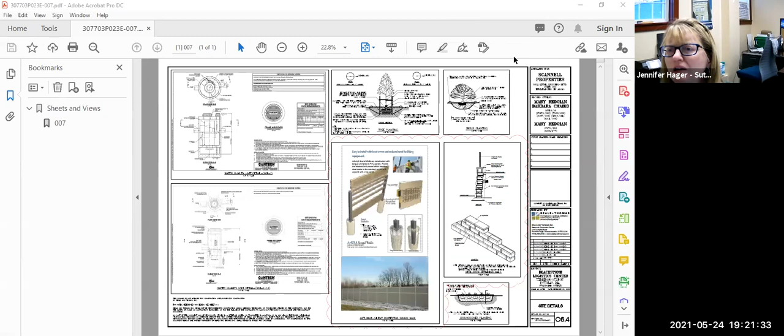Okay, Jen. I'm going to share my screen and pull up the revised plans that were provided. One moment, please. All right, can you see that okay? Yes. Yep, awesome.

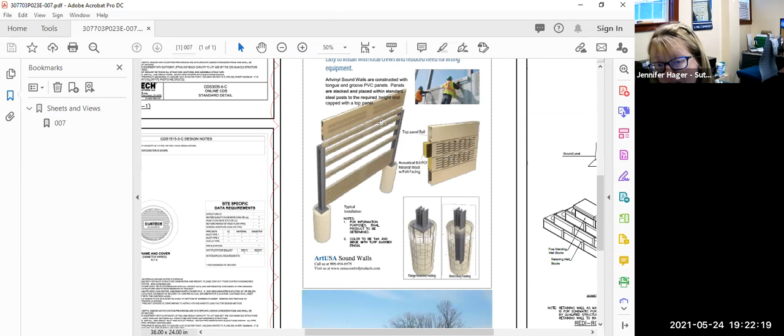All right, so on this plan set, you can see the applicant has updated a few things. They added a photograph of the potential sound wall type, which seems pretty benign here. The only two things missing are the color, which frankly is fine if it has a name, and this panel detail, which really needs to be eliminated for confusion, because it's the weird punched louvered detail I've shown you photographs of, which looks horrible when used at a large scale.

So it's a minor item, but this detail needs to be shown as solid panels that match the photograph. That just needs to be updated.

Jen, do you take that one real quick? Sure. So if you look on note number 2, that addresses both of those comments. It clarifies the colors to be tan and beige, which is the actual color code by the manufacturer.

On this? Yes. And then the turf barrier is actually the smooth face. I can pull up a brochure from the manufacturer, that's their code for that. If you can just submit that brochure, that'd be great, and we'll just make it part of the record. I'll be comfortable with that if the board's comfortable with that.

I was going to say, we tried pretty hard. We've been working with the engineers over at the manufacturer about getting a better detail, and I don't think the details they've provided so far would be more insightful than what you've got. Yeah, I did look myself to try to help you out, but I didn't find one either that was better for detail. Yep, we'll send that to you, Nate.

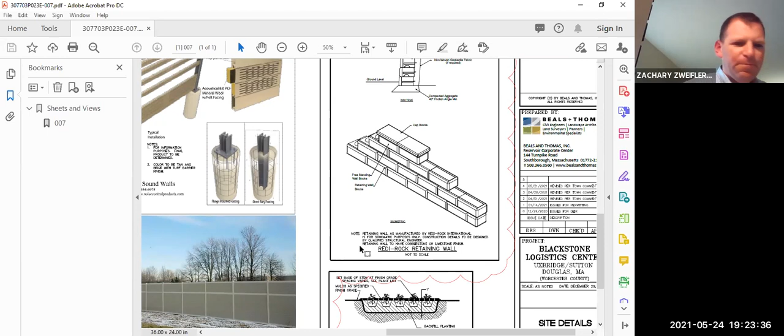And as you can see, a note has been added here: retaining wall to have cobblestone or limestone finish. So that was the requested finish on that wall. So that's that one.

Jen, could I make one comment to the sound barrier? Sure. The sound consultant had made a recommendation for a minimum weight in pounds per square foot of the sound barrier material. So I believe the board will want to make sure that has been achieved as well. That's the 5 pounds per square foot. I think so. I don't remember the number, but it was in that ballpark, yes.

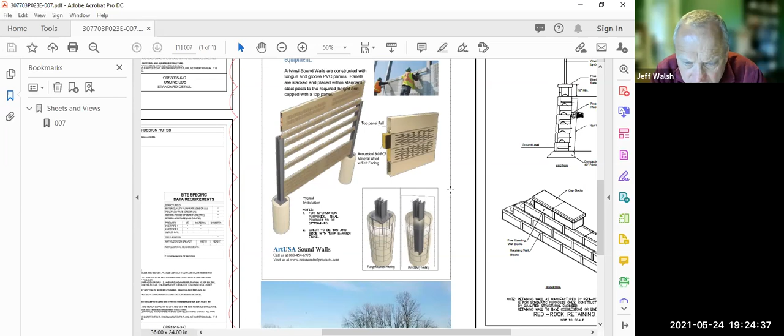And I'm seeing this acoustical panel that's not going to be used is 8.0 pounds per cubic foot, not square foot. Nevertheless, it's just a detail that should be double checked to make sure it's the material recommended, or one of the materials recommended by the sound consultant. Thank you. If we can, the sound consultant's on the call, he can validate right here, right now. That's helpful.

All right, Mr. Chairman, are we done with this one? Any board members have any comments on this? Hearing none, then we'll move on to the next item.

Okay, so the next one is this one. All right, so what we see on this one is, per my request, basically a note that grays out this northern parking and shows it as potential additional paved parking, and shows how this edge would be finished. It's not clear here if, because the landscaping still shows dark, my assumption is that landscaping is staying, even though it's kind of weird right here.

So that just needs to be clear if it's intended for this landscaping to stay. And then the thing that was not addressed was my secondary comment that came via email, which was that this trailer snow removal area is in kind of an awkward position because it's in the circulation around the building. And in part because we don't have any detail what's actually happening here, that could cause a problem, obviously.

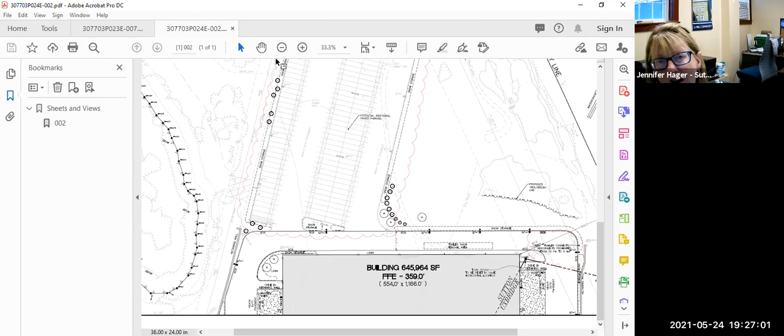And then the only other thing on this plan was to see if the board is comfortable with the hours on these signs, because the hours are per the sound study comments. They have used 10 p.m. to 5 a.m., so trailer connects and disconnects are prohibited from 10 p.m. to 5 a.m. So, knowing if the board is comfortable with that, or if they're open to trying that and putting in a condition that if we get a bunch of issues, those hours would get shortened in the evening and lengthened in the morning. So those are the few things on this page of the plan set that I'm looking for applicant input on or board input on.

So I have a question.

Did I read that this lot is proposed if needed? Because we're calling out for 428 spots and there's only 178. This could be added if needed, potential added, right? Yes, so one of the waiver requests is asking you to go from 428 down to 178, with this banked basically.

You'd probably have a condition if you vote that waiver, as well as a condition of approval, that the applicant has to come back to you once they know who the tenant is, to review the specific parking needs, add stuff up front if need be, and or do some monitoring like we do on other uses to see if operationally a problem arises and then the stuff needs to be added. So right now this is meant to be banked and not paved over, but that's up to you guys when you deal with the parking waiver.

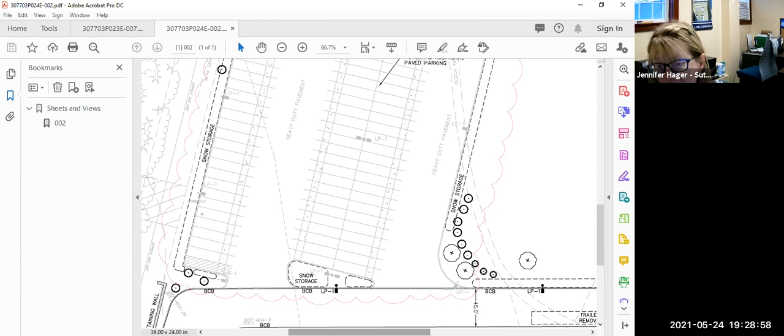If you're not comfortable with that, then you would have them build out all or a portion of this, and you would designate whether that would be trailer or car or some combination thereof. Well, I guess it makes a big difference if 2 trucks are leaving a day, they don't need all that, but if 500 are leaving an hour, then it's going to be a different story.

There's actually snow storage all along both sides of that lot. Great. Okay, so Todd, any more board comments, Mr. Chairman, or do you want to pop it to the Scannell team?

This is Mike Gagan, if I could just have a quick comment. I would just kind of follow up on what Jen said about the snow removal piece, and wondering if there's been any thought of the removal area not being that close to the building, in that turnaround. Is there any other way, anywhere else away? It does seem like if there were many trucks leaving after the storm, it'd be a lot of snow to be moved from that area over to the snow storage area, hindering the pattern, as Jen suggested.

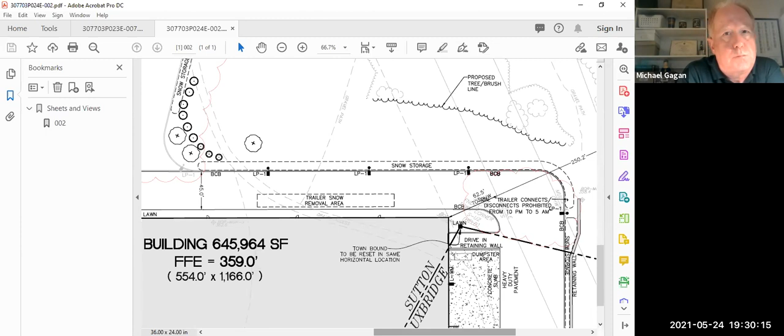Okay, so why don't we, as the development team, try to answer those questions? Perhaps we can start with that landscaping question that Jen raised about those portions of landscaping that still show on this plan. Go right ahead, where are those going?

This is Dan Feeney from Beals and Thomas. If the northern parking area was not to be built, the landscaping would be eliminated. It would not be included until that parking lot would be built. All right, so there would be no landscaping along this edge.

Correct. All right, so just gray those out. Is the board okay with just these ones? These ones would still be here, right? Right, but these ones would be eliminated. Is the board okay with that?

So in the area where the proposed additional parking is, if it's not utilized and paved, what would it be? Just an open field or just? What's there now? Right now it's an open area. You know, there's no significant vegetation out there.

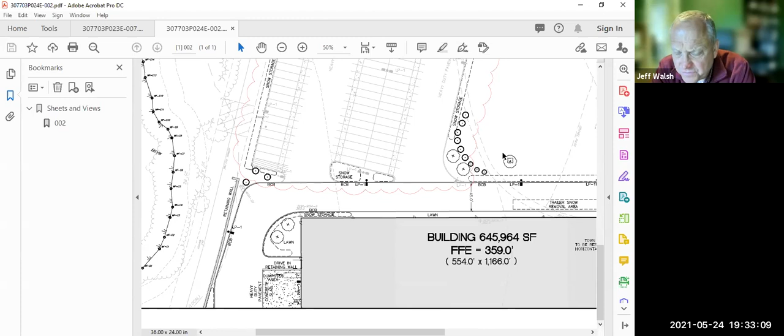And that landscaping is in and around that open infiltration basin I spoke of earlier. There's a basin? No, here, right up against the landscaping. Right, oh, here? Yeah, it's down in that general area, Jen.

So the basin stays, Dan Feeney? The basin would stay, would promote infiltration there. It's not a large basin, it's a very small basin there. So Jeff, do you see a need for the plantings in terms of safety or functionality, or just aesthetics? Aesthetics, okay, at the back of the building.

So if there's a basin in this area and these aren't planted, this would all just be graded, loamed, and seeded with whatever the basin calls for? That's right. There's a pretty steep hill on the right side of those plantings going up to the tower, to the right of the page. So at least this area would be kind of loamed and seeded and need to be maintained.

My recommendation, if they use some or all of the north parking area for staging during construction, that's fine, but it should be permanently stabilized with some vegetative cover after. If they leave areas further north where they don't even go, it's growing in, taking time. I'd call it thin vegetation now, but it's a mix of grasses and brush generally, with a few saplings coming up. If there's a way to augment the vegetative cover, that would be nice. I don't expect a lawn or anything, but beyond what would be stabilized with vegetative cover for disturbed areas, it would be nice to try to augment some of that growth that is coming in and has been over the years.

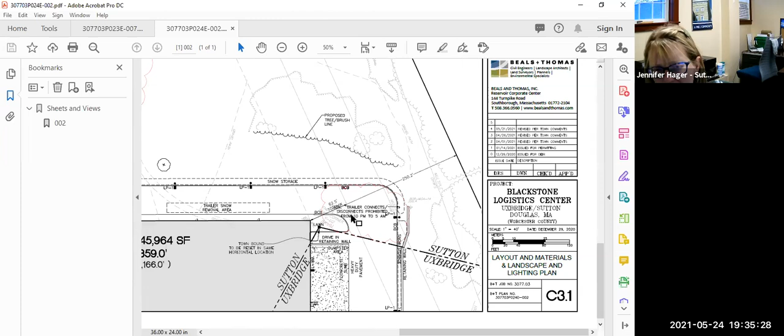All right, so how does the board feel about these hours where you can't connect or disconnect trucks? 10 p.m. to 5 a.m. Are you comfortable with that?

Through the chair, I feel like those hours, at least to start with the condition that if we get a bunch of complaints or any issues popping up, we can change those or come to an agreement further down the line, would be great.

Do those hours correspond with the applicant? Are they happy with that? Well, we don't know the specific user. Correct. I guess if you ask happy, I think we'd prefer to have no restriction on our movements, but it's reflective of the recommendations we got from the sound consultant. So that's where we pulled it from.

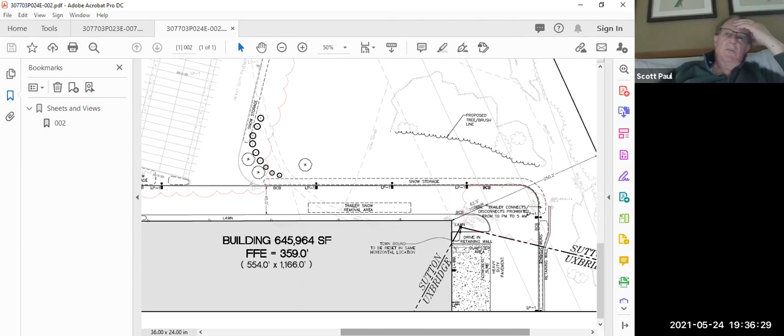No, that's fine. And is that because there's backup beepers on all these trucks when they're backing up? Well, and that connect-disconnect makes a loud noise, the air hoses. So yeah, that was part of the Cavanaugh Tocci recommendations, I think. Yes, the banging of the steel when they're coupling, and in the back, when they're coupling up, and if they pull away from the trailer and they don't have the landing gear on the trailer all the way down and it drops to the ground, it's going to make some noise as well.

All right, so anybody want to comment on the trails, what we're really doing for snow removal off the trucks? On the applicant's team? Want to take that, Dan?

That'd be great. Thanks. You know, because there's no tenant, we don't want to box them in necessarily. We picked the location shown here because it's on the outbound exit for trucks coming back around the building to exit. So it's on the exit side of it. If it was a mechanical blade removing the snow, it would compromise some of the width of that access drive, but that's a 45-foot dimension, just to the left of the trailer snow removal area there. That's a fairly wide access driveway. So if we're taking up 15 feet for the mechanical snow removal, it's still leaving a 30-foot wide access through there, which is a more typical two-way truck traffic access. So there is some room in there to do it. Based on the layout of the site, it seems like an appropriate place to have the snow removal.

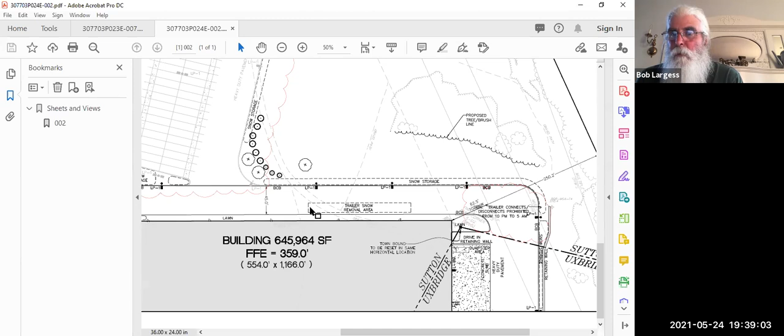Bob Largess, through the chair, if I understood where the traffic was going to be moving in and out of the property, I thought putting it right there would take care of itself. Obviously, if there's snow, it has to come off the top of the tractors, and there'll have to be a piece of equipment there to get it out of there. Otherwise, they're going to clog up their whole system. So someone is going to be in charge of a backhoe to keep that clear so the snow gets out of there and the property can actually work. Yeah, it'll be an operations issue for the tenant out there to make sure they can move it and deal with it. Nothing's going to happen—there'll be no hooking up to anything because everything's going to stop.

That's why it's a great spot - they have to deal with it, they can't ignore it. What we're anticipating is these mechanical blade snow removal units - there's options where they can come out on wheels, so they're not out there year round. They can wheel them out, the supports come down, the wheels come up. So they're flexible with where they can be located on the pavement - it's not casting concrete into the ground at any one location.

So it sounds like you're most comfortable with some kind of condition? We're not sure we really understand what you mean by that - we've got a trailer snow removal area, we're talking about an operational question more than anything. We have the area, we'll provide for that. A condition would say that the area needs to be designated on the site - the operator, whoever's actually occupying the site, has to tell us exactly how that's going to happen before they start operations, because we're not going to wing it on the first snowstorm.

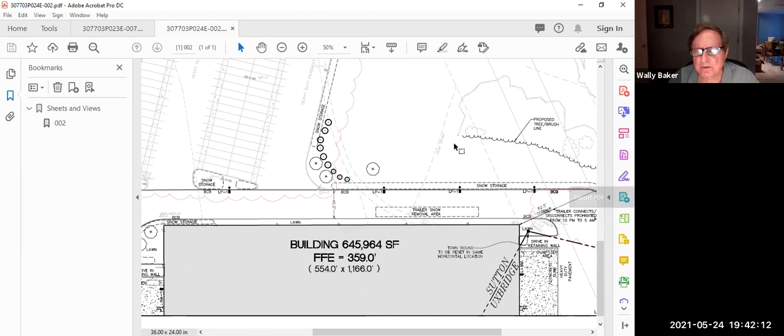Perfect, okay, good. You happy with that, Jen? I'm happy with that, but I'm not making the decisions. Well, could we make it a condition of occupancy or something? I don't know, well, let's see what language Attorney Donahue drafts.

All right, so no landscaping here. We'll go with these hours for now and have a condition if there's issues that are revisited. And then Attorney Donahue will draft a condition relative to snow removal. Is that where we are on these few things on this sheet? Yes. Awesome, all right, let's go to the next sheet.

I believe this is the open space plan. I just wanted confirmation, Dan Feeney - it's kind of hard to see the outline of lot 1 here, but it looks like it goes to the Route 146 line here, and then kind of down along here. So of the portion that's in Sutton, which is right here, you're saying that there's like 1 million plus square feet in Sutton.

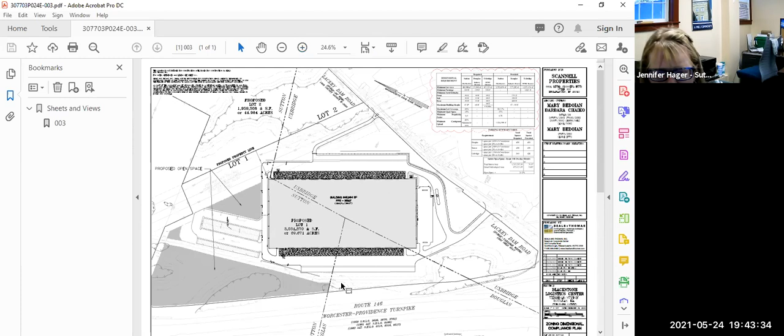And that these gray areas, they're not in easements and they're not being developed in any way. And that those areas equal roughly - let me just scroll over there - right here, 473,000 and change is what is shown in those gray areas, which is almost exactly 35%. Is that - I just want to verify that. That is correct, yep, the gray areas are outside of the easements.

You can see where the Tennessee gas easement is in between the gray area and the gray out northern parking. And then the other area, we're right up to the 250-foot national grid easement. And then just to get up to the 35%, there's a little bit north of where that larger snow storage area would be.

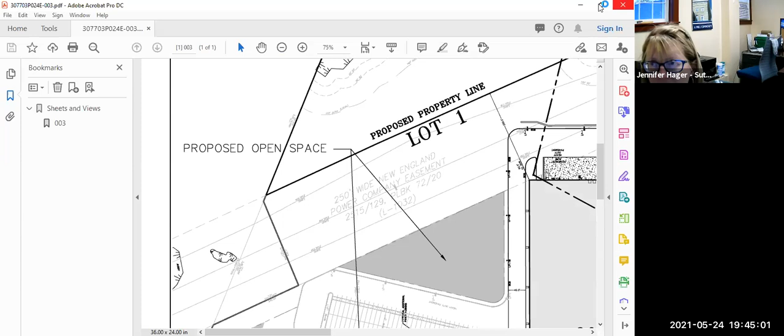All right, okay, I just wanted to confirm that. And then this plan would potentially just be attached as a back sheet of any special permits, and that would be the means by which that would be restricted if the board's okay with that - so it'd be referenced and recorded along with the special permit. Yeah, good with that? Okay.

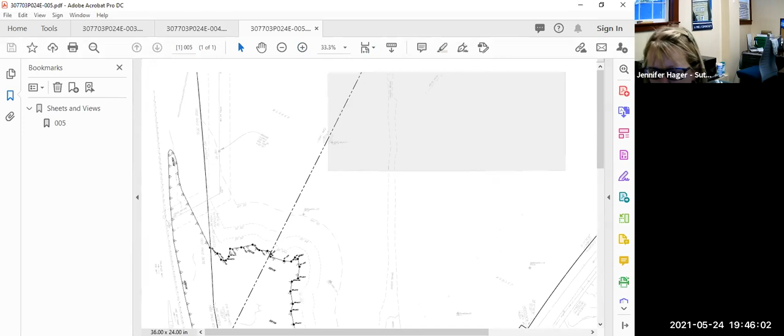Okay, this sheet. All right, so what we have here is a few minor things. The applicant has added a sign location right here, and based on the position of the signage relative to the edge of trees and the stop line, it would appear that's not going to be an issue with sight distance because it's behind the stop line and behind the tree line.

And then there is a tractor trailer right turn only sign right here. Though I had preferred an island that forces you to turn right, the applicant wasn't really comfortable with that because it's hard to not let employees turn left. So you'd be making everybody turn right, and it might inhibit the swing as well with the trucks turning in to the left. So is the board comfortable with that sign location? Is there anything other than this right turn only sign you wanted? And did you think that should be a minimum size?

Mike, do you have any comments on this? No, not really. Like you said, Jen, I trust your judgment on the sign location is sufficient. On the issue of a dedicated right-hand turn, I think we should defer a little bit to the folks in Uxbridge where the land actually is, that entrance. I think they're the ones immediately impacted by that, so my opinion would be to defer to that town who's being impacted by it the most.

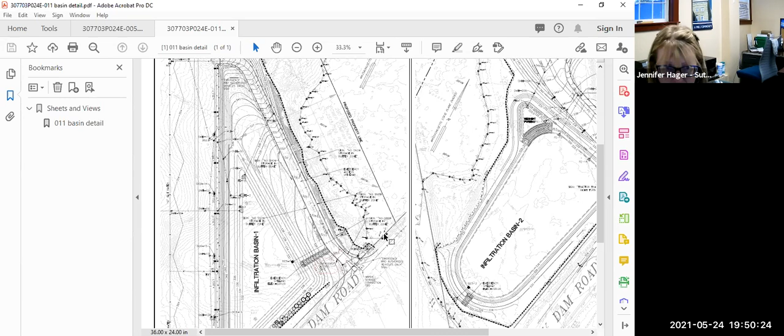This plan does show the water connection coming from Whitinsville Water District, just calling that out. My one question was maintenance of these basins. How will maintenance be achieved on these basins? You kind of go in and then have a little berm here. But they're not small basins.

Dan, did you have any detail or comments on how these would be maintained over time? Yeah, as part of the stormwater management report, there was an operation and maintenance plan submitted that specifies the frequency of observations needed on the basins, as well as catch basins and water quality structures and the other stormwater components on the site.

In terms of access to infiltration basin 1, as you get a little further up the page, right where the 335 contour is, it's pretty flat shot into the berm of the basin there, and then you can go around the basin. If you come in anywhere down from there, where that 337 contour is, that loops over towards the basin.

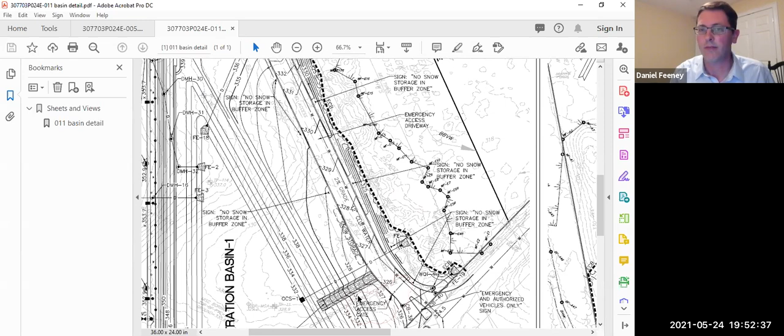Infiltration basin 2 is similar. The grade of that basin, the top of that berm, isn't that different from the entry drive. And it's right off of the entry drive, so you can get around that basin as well, and into the bottom of the basin for any maintenance that you need to do.

Yeah, they are significant basins, so I wanted to be sure we had it on the record that, like you said, in the plan, there's a way to get in there that's reasonable.

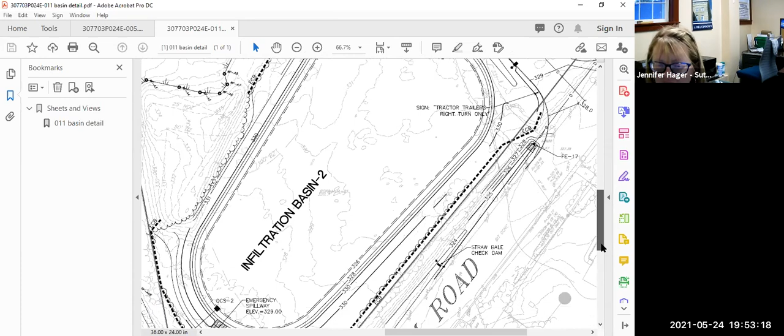All right, so I'm going to stop share. I'm just going through my, oh, whoops, sorry. You thought I was done torturing you. Just 1 minute.

No, it's not here. It is not here. I was going to pull up the architectural plan, but you guys have seen that.

So there's been some great little windows added to that. The colors have been called out, which is awesome. But I just wanted to review just a few things with the board and make sure you're okay with those, and or see if you wanted to defer those to somebody else or whatever.

So the detail sheets on the architectural plans now clearly show the vertical lines on the building, those breaks between the panels. The concrete wall panels are about 3.5 inches wide, about 3/4 of an inch deep, so they're pretty tiny little divots. But I don't know that they're any different really from the Prime Metals building.

We're hoping that you'll basically see that scoring. The interesting thing though is on the building plan - you've got a building that's 1,166 feet long, pretty long building, and then it is 554 feet wide. And the proposed bump outs, those 3 bump outs on the front, are 10 inches deep.

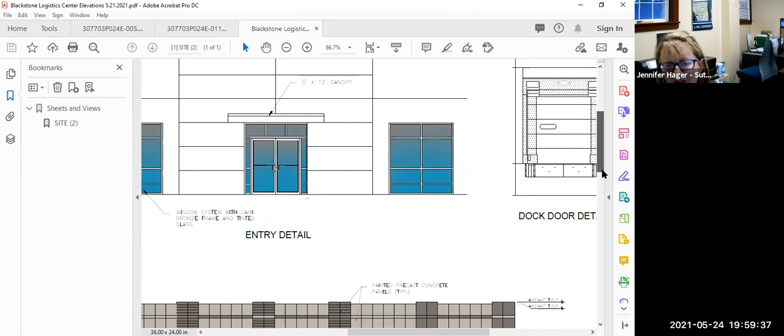So this is the office doors. You've got a little 5x12 canopy over the front, and these are the little bump outs. So these three columns here are scored, not really a different material, they're just scored differently. And they stick out 10 inches.

Like I said, let me show you the other one. Can you see that one? When you look at this one, see, this is the detail - those bump out 10 inches deep on this giant building.

These are the little bump outs. So this is 1,166 feet long, and these bump out 10 inches. There's 3 of them. There's 3 of them.

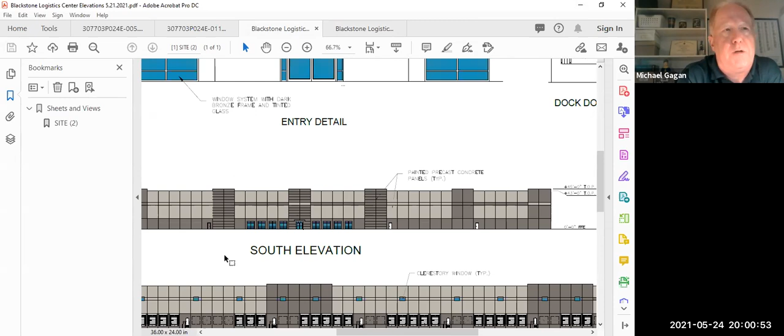Jen, can I just ask though, if you were looking straight on, would it be more important to see the depth of the bump out versus the scoring of it, which would visibly look different than the rest of the building? I think the scoring certainly helps. If it was a different material, like a wood tone or a stone tone, it would look even more pronounced, and maybe you don't need as much depth, but it's the same color, and the only difference is kind of a difference in scoring. So that helps if those kind of pop out more. It's kind of a combination of the things.

But again, this does sit in Uxbridge, this elevation. So, I mean, you can just, if you don't feel strongly about it, you can just leave it to Uxbridge. And if anybody says that wasn't all that creative, then you can just say well, it's in Uxbridge.

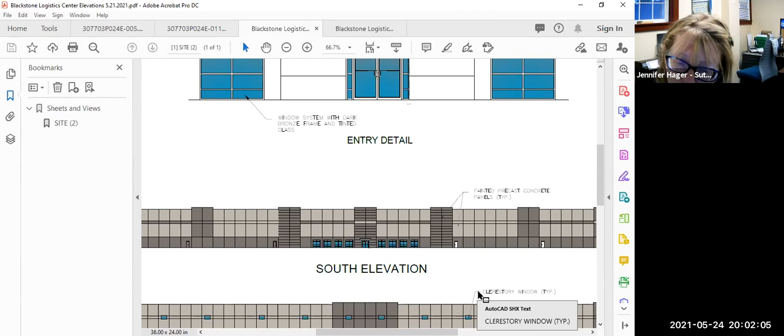And there is going to be a bunch of landscaping, obviously, between the front of this building and the road. But as you know, as we've done with every one of our industrial buildings, even if you don't see it, we try to make, unless you're into the site, we try to still make it kind of speak of the quality and of the building, of the company and the community.

Again, I'm not going to be hurt if you guys disagree with me. I'm just calling out the facts, and I am happy that those windows were added along the sides. I do think that makes a difference even on those very long plain sides. I think that does make a difference.

But these elevations are showing different colors or shades. Yep. Of cementitious or EIFS type material, right? So yep, visually they look different.

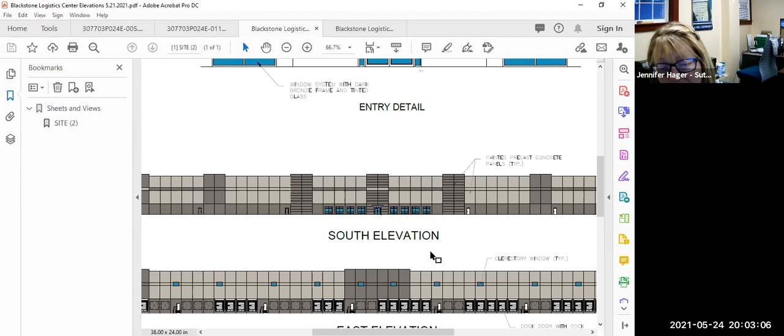But what do you think would be a good relief, like 24 inches or 10 inches? Well, on a building this big, the deeper the better. But I mean, yeah, you would at least give it 2 feet, 3 feet at least, or there's a lot you can do with this kind of precast concrete panel. Maybe there's something different you can do to make this look more stone-like. So that I just don't know.

This is the one thing I didn't look into. I usually do go right to the companies and look at their stuff and see what's out there to try to be helpful instead of just whiny in terms of plans, in terms of architecture, but I haven't been able to do that. So completely up to you guys.

If you think more relief should be added, then we can put the applicant back on the task of adding more depth, and or if you think something should be done that's more of a variation in those 3 columns. I mean, I don't know why you need them on the back, other than that's a very engineering kind of thing to see that complete on the back of the building, how you see the 3 same.

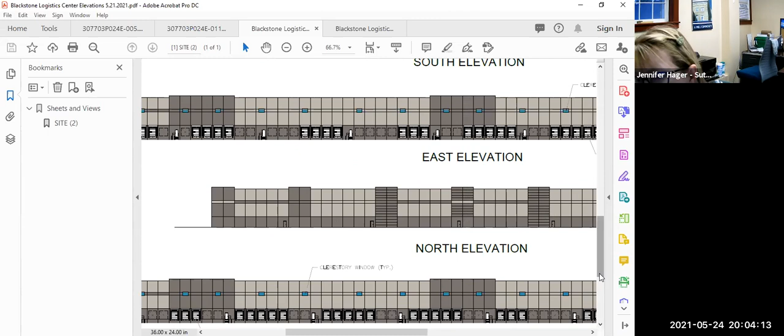It's nice, but not necessary. I would think on that north elevation, if it costs any more money, I would lose those. But yeah, put the money in the front. No one's going to see the back. Right, I'd be willing to support the increased relief, not just to support Jen, but it's been consistent with all the other buildings.

All right, Mr. Chairman, if you just want to run through the board so we can move past this one. Okay, Mike, Kyle, do you have any comments on this?

Personally, I don't know if it's really needed. This is a giant building. There's only so much you can do that's really going to break it up, and I think they've done a good job with different colors, adding windows. If the board feels strongly about it, I'll support them on that, but personally to me, it doesn't make a difference either way.

Bob? I would feel stronger if the whole building was in Sutton. But this is, we have two other partners, and if our partners are fine with this, then I want to be part of a team. There'll be other places I'd want things to stand out in Sutton, but I wouldn't draw a line in the sand here over that stuff. I'm happy as it stands.

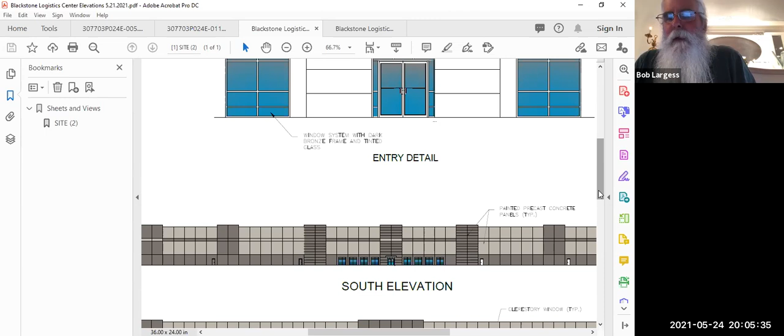Scott? I would agree with that, and we have other potential challenges facing us moving forward in Sutton. I probably will never drive by this building except to take a look at it. I think it'll be blocked by trees from what I can see, as I have driven by here, and it looks like it'll be nicely blanketed by trees and set back pretty far from the road, so 10 inches, 2 feet, I'm not sure I'll be able to differentiate that.

Mike? Yeah, I would really just concur with Bob and Scott as well. I don't think it's the biggest issue that we need to look at, given that it really is in the other town's piece of the building. Again, I think if you're looking at what she said about how far it was out, bumping it slightly more, I don't think it's going to make a dramatic difference. So I don't really have an issue with it.

Having been at the town meeting a couple of weeks ago, there's always the discussion of, oh, these are big and we're going to see it and all that kind of stuff. So to me, the money being spent on large visual foliage, plantings and trees to separate and block views of the buildings makes them more palatable. Makes people stop saying I can only see it all day long, and geez, those trees are nice. So I think the money's better off hiding it rather than making a lot of relief issues too.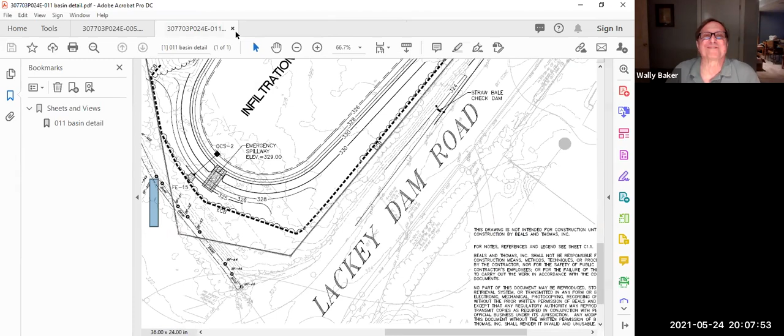So, see proof that the board are not my puppets. We're going to think I did that on purpose.

Okay. So open space we dealt with, truck cleaning we dealt with, sound wall we dealt with, times we dealt with, the bump out, and then the earth removal.

You have a note for earth removal on one of the sheets. I did forget to pick that up. The note says, based on geotechnical recommendations, earth material will be spread in undeveloped areas or removed from the site. So it's my understanding you may be considering withdrawing the earth removal application. If so, I would just either adjust that comment, or we'll make sure we put a condition per our bylaw that anything over 300 cubic yards either needs an exemption application or an earth removal permit.

I thought I saw some calculation in Jeff Walsh's comments about this, and it's a lot more than that. But he thought that the plan could go forward without the need for a permit. Is that right, Jeff? Am I putting words in your mouth? I apologize, Scott, I don't recall that. Let me take a look.

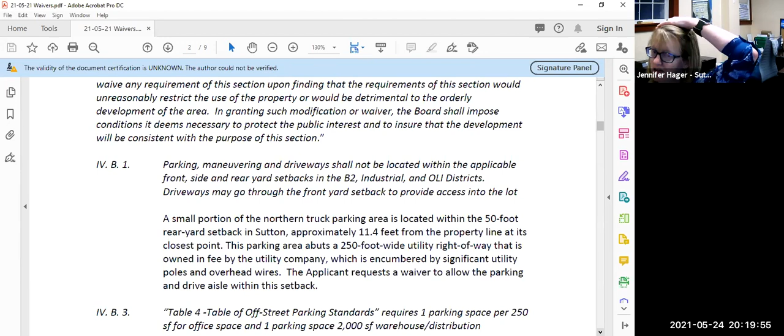So this first one, 4B1: you can see the northern parking area that right now would not be constructed, but would be if need be. That northeast corner was in the setback, and as you recall, it abutted pretty much just the rest of the open land there, not really a direct usable abutter. So how does the board feel about allowing the parking and maneuvering in the setback in that northeast portion, which may or may not become employee or truck parking, depending on the applicant?

What we're looking for on these is: that's not our waiver, or this one is - motion to grant the waiver and why, or motion to grant the waiver and why with conditions.

Through chair, go ahead Kyle. I'll make a motion that we grant the waiver for the potential parking in the setback near the property line. I'll second that, but I have a question to clarify - it says approximately 11.4 feet from the property line at its closest point. So on average, what is that number, and for how long along this line approximately?

Dan, did any of the new sheets show that? You'll see it grayed out in sheet 3.1, which was the one that had the remote area grayed back. It's hard to get an average. There's a point - you can see the point right there. Right, that's where it's 11.4 feet off.

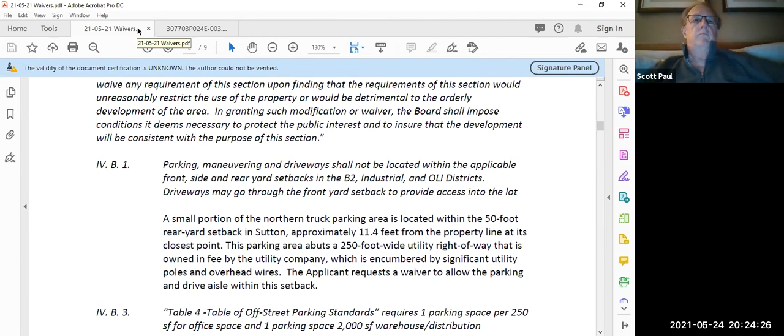Any comments? Hearing none, the chair votes aye. Mike, aye. Scott Paul, aye. Bill Talcott, aye. Bob Larges, aye. Vote passes 5-0 and one abstention. Kyle, I'm abstaining, acting as associate member right now, so my vote wouldn't count anyway.

Okay, so the next one is the overall parking thing. According to our regs, they need 428 parking spaces. They've got 178 employee spaces. The rest of the spaces on the site, per comments by both Jeff and myself, are really just tractor and/or trailer parking spaces. So you need to decide if you're going to waive down to the 178, and whether to count any of those trailer parking spaces, in which case we'd add stuff on. And no matter what you decide, you might want to condition here in the waiver vote and/or later in an action vote what happens when you have an actual tenant lined up.

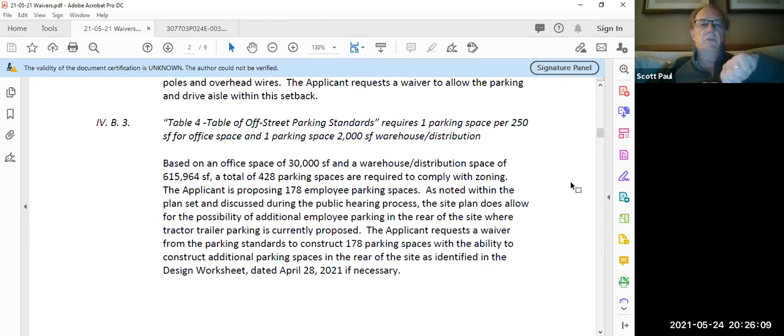So I'll make the motion, but I'd like to get some clarification first. I make a motion that we grant the waiver for 4B3, table 4, for off-street parking standards and the requirements for the number of spaces as written. I second that, Bill Talcott.

So my question is, the 178 parking spaces are shown for cars, is that correct? Yeah. The trailers are shown all around the building because we anticipate this is a place for trucks. If there's more trucks needed, then that ancillary lot to the north is available for construction - is that my understanding? For trucks or cars?

I think the reasoning Jeff and I gave was that when we look at parking standards, it's usually kind of about the employees, not so much what you saw on these edges, which was more operational spaces in nature. We were thinking the parking standards are for the employees, so it's not likely that Joe would pull in his pickup truck, park it in a tractor trailer space, then take his tractor trailer and leave. He's gonna park his pickup truck somewhere else and then take his tractor trailer truck and leave. So these are kind of operational spaces - they're really not part of what we typically do for parking calculations.

So now the board as a whole or a majority can feel differently and say, hey, there's 178 parking spaces and there's X tractor trailer spaces - it's not on here anymore. So we either meet the requirement or we'll allow a waiver considering these, as long as when the tenant actually comes in, they have to tell us about their operation and their parking needs, and we'll add more if need be, tractor trailer or employee spaces.

I know, but are they gonna have a tractor and a trailer both sitting there, the 100 of them? I think our traffic numbers are pretty explicit that we have more tractor or trailer spaces than we do truck trips a day.

Okay, so the intent is that there would be either trailers stored more than one day, and or there'll be multiple trailers there for a single tractor.

So if you think about a normal movement, a tractor will pull onto the site, drop its trailer, pick up another one. That's at least two spaces right there, assuming every tractor is picking up and pulling out a trailer, or every trailer is getting moved every day, which is often not the case.

So in the worst case scenario, the tenant that comes in here needs 927 spaces. That's not gonna work, right? That tenant can't get considered because there's no space for them.

Right, yeah, I mean they'd have to come in with a revised site plan and say how it works, or they can't go here, right?

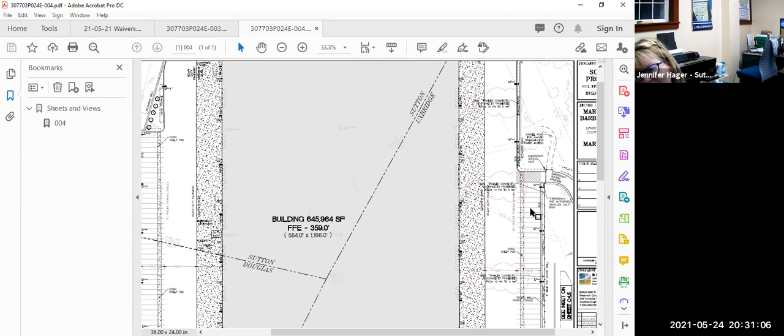Right, okay. So initially you're going to have all of these spaces, which it looks like that says 75, and all of these spaces, which looks like 60 or an 80, those will be constructed, and then the 178 employee spaces.

So those all do get constructed, all of these and all of these get constructed, and then all of these. Don't forget, you've got everything along the building as well, so you've got a bunch of active docks.

Non-active docks, correct? So that can be used as trailer spaces as well. Right, yeah.

So if you're good with it, you grant the waiver from 4B3 for the parking as shown on these plans, 178 plus what's there for tractor trailer, and then we would revisit it with the tenant, have the tenant come back in and talk about their actual operations and parking needs, and then they'd be required to construct additional spaces here for employees and or tractor trailers if necessary, based on that revisiting.

So I'd like to amend my motion to include what you just said. Did you write that down? I have it, it says revisit with tenant. So I'll spitball it, all right.

And Bill, are you okay as the second on that with just that? Yeah, I'm okay with a second. And how many spots are in the ancillary parking for cars and trailers?

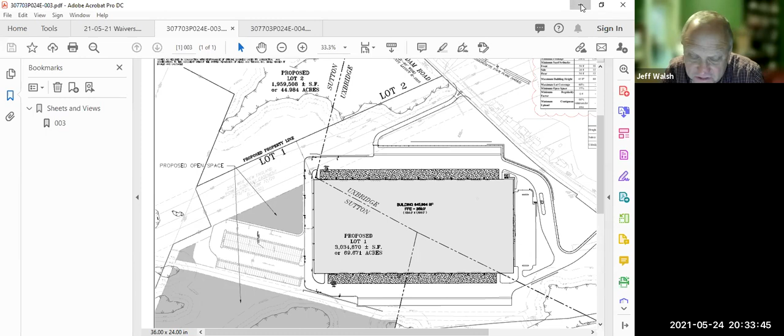I can help Dan out with that. My notes here say that there would be 500 passenger vehicle parking spaces in the north lot if it were constructed as passenger vehicle spaces, plus the 178 at the front for a total of 678.

So 500 cars, Jeff, is that what you said? That's what I've got in my letter, yes. That's correct. So 500 cars equates to 116 tractor trailers up here. Yep, that sounds about right.

The way I see it, parking for trucks is not addressed in the zoning bylaw. It's parking for passenger vehicles, people coming to work or to do business. I look at trailer truck spaces as the same as inventory spaces on a vehicle

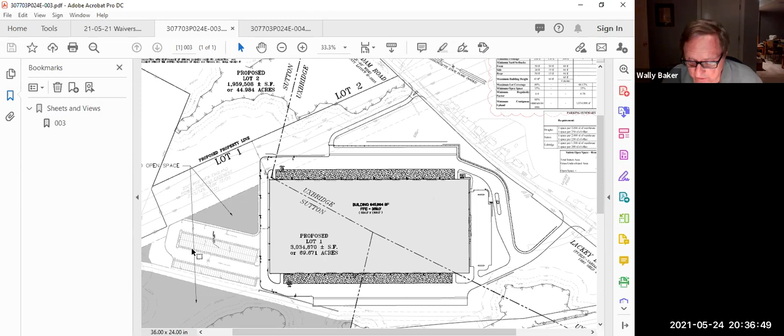All right, so you ready for a vote on that one? Sure. The chair votes aye. Bob, aye. Bill Talcott, aye. Mike Egan, aye. Scott Paul, aye. Okay, the vote's 5-0, and Kyle will abstain.

Okay, let's go back to waivers. Next one's easy. Our bylaw maxes out driveway width at 30 feet. They need 45 for obvious reasons.

So who wants to give me that super easy motion? I'll make a motion we grant this waiver for 4B4E, relative width of driveways, as written. Do we have a second? Mike Egan, second. I'll second it. Okay, any comments on this from the board?

No. Okay, I guess I should ask for comments from the general public - forgot about that. Hearing none, chair votes aye. Mike Egan, aye. Bob, aye. Bill, aye. Scott, aye. Okay, vote is 5-0, and Kyle abstains.

Right, so next, section 4B5C2 requires 5% of the parking area to be landscaped. As you know, the landscaping is around the edges of the parking, not in the middle.

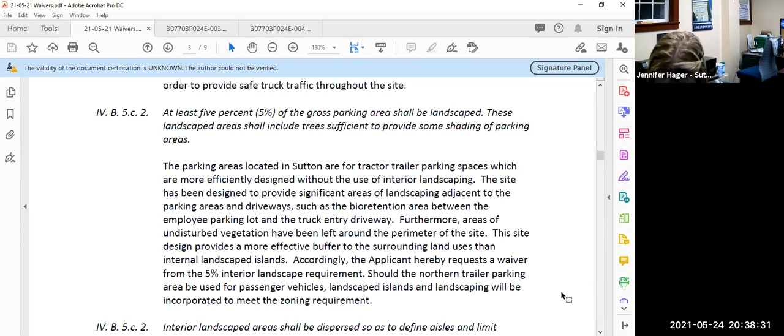So what say you? I'll make a motion to grant this waiver for 4B5C2, relative to the percentage of landscaping within the parking area. Bob Largus, second.

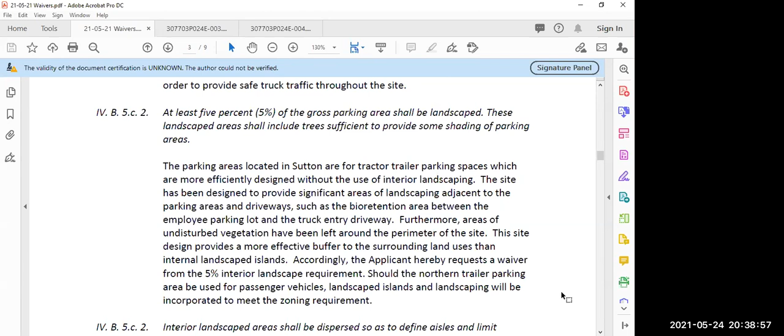Any comments from the board? No. I do have a question, Wally - go ahead. If the ancillary parking gets built out, do we revisit this waiver? Depending if it's just going to be employee parking, it might be considered more applicable than if it was tractor trailer.

Would we revisit it? Or will this, if we vote this, also take care of the ancillary lot - you would not need any 5%. Sounds like maybe the motion and second should be revised so that you revisit it if it's employee parking in the north.

Make a motion to include what Jen just said. You approve, Bob? Yeah, okay.

Chair votes aye. Bob, aye. Scott, aye. Bill, aye. and Mike, aye. Vote passes 5-0-1.

All right, 4B5C2 - you've got to have basically a landscaping island every 100 feet. That has not been proposed in the tractor trailer or employee parking in the front, for ease of maintenance. How do you feel about that?

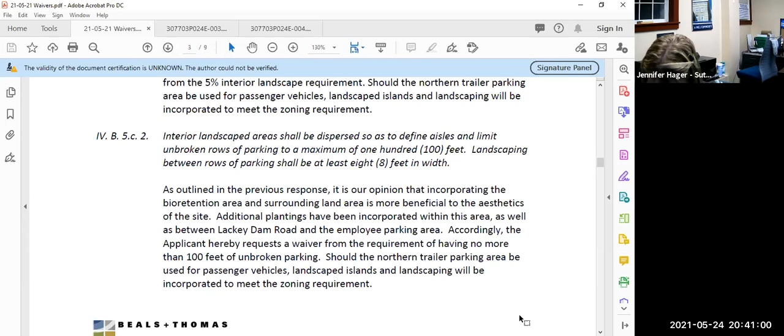I think this makes sense. I'll make a motion to grant this variance for 4B5C2 relative to interior landscaping areas every 100 feet along a parking area, as written. Do you want to revisit it on the north, or are you fine with no interior aisles longer than 100 feet, and would like to revisit this on the north lot based on the future tenant? Bob Largest, I'll second that.

Any questions from the board or comments? Hearing none, the chair votes aye. Mike Gagan, aye. Bob Largest, aye. Bill, aye. Scott, aye. Okay, vote passes 5-0-1.

4C4F, there's no screening on the dumpsters because it's smushed up against the building and sits way back. Well, not all the way back. Let me show you. Oh sorry, wrong one. Sorry. They kind of sit in these corners. So there's one here, there's one here, and then up at the front of the building, there's one and one on those front corners of the loading dock. So way down in here.

So if you're good with that, then you can go ahead and do this waiver. If not, they need to come up with some screening for the dumpsters.

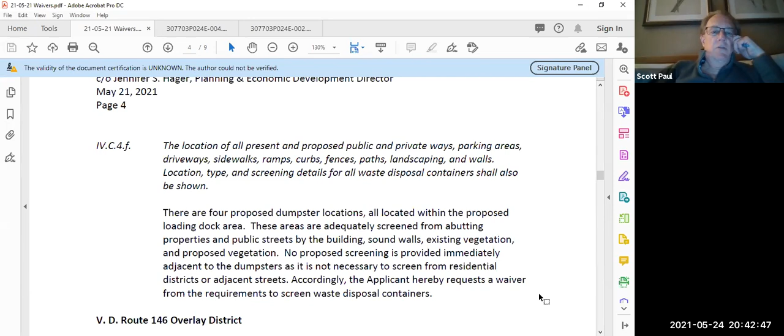I'll make a motion to grant the waiver 4C4F relative to, what do you call it, screening the dumpsters, as I don't think they'll be noticed beside this large building. Bob Largest, I'll second that. Any questions or comments from the board? No, okay, hearing none.

Scott, aye. Mike Gagan, aye. Bill, aye. Bob, aye. Chair votes aye. Carries 5-0-1.

All right, for 5D4A3, obviously this is a previous earth removal site. So there are some parts of the site where work will have to take place on slopes greater than 15%.

There are no slopes, and you can confirm, Jeff or Dan, that will retain 15%, or you won't end up with any huge steep grades in the end, other than maybe in some basins, and that will be properly stabilized, right?

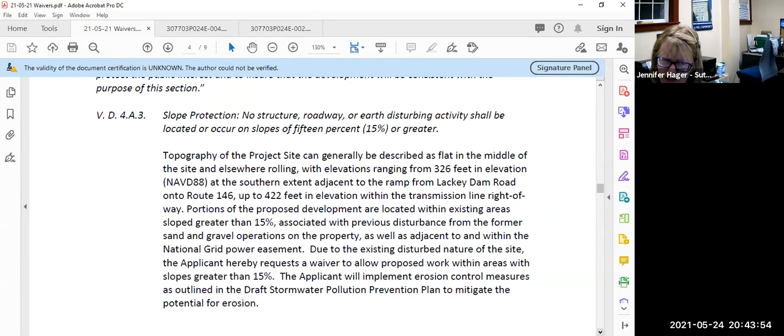There is, at the northern end of the site, opposite where the snow clearing area was designated - no, not the snow storage, the snow clearing area down along the access drive, right adjacent to the building. If you go in here - no, if you go north, right where your cursor is there, we're in a cut there, so we will be having off grading. I think it's a 2-to-1 slope up in there, but it will be properly stabilized.

So in addition to the basins, that area will be a steep slope. Okay. Jeff, did you have anything to add on that? No, what they're proposing is consistent with standard engineering practices. And I recognize that it's kind of hard to work on a site this big and not have any grades exceed 15%. So I have no issues.

All right, so who's good with letting them work on slopes over 15%? Can you go back to the waivers? Oh yeah, sorry. I'll make a motion to grant the waiver for 5D 4A3 relative to working and maintaining slopes greater than 15%. Bob Largess, a second.

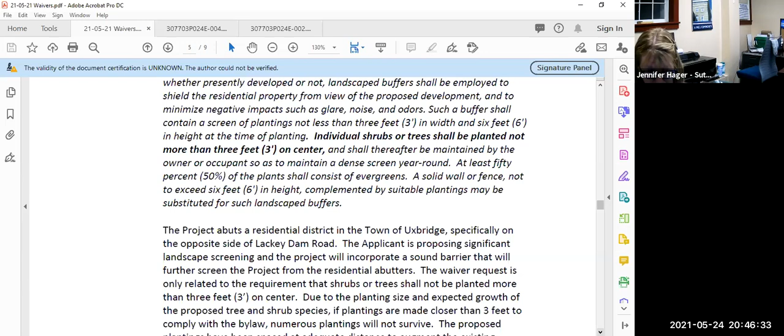Want to add anything to that, Dan Feeney? No, that's correct. We're proposing over 350 evergreen plantings out between Lackey Dam Road and the site development out in the front there. Some of them are significant, with initial planting heights 8 to 10 feet that are going to grow from there. If you have them too close, they won't survive - every other one wouldn't survive if placed closer than 3 feet on center. As you saw from some of the videos showing the screening, it's an effective screening method that will promote the health and viability of the plantings.

So, what would you say, 350 plants will be planted?

What's an acceptable survival rate for that over time? If we grant this, I'd like to know that they will be replaced if too many of them die off. Yeah, we place the standard condition we always do, that dead or diseased plantings have to be replaced.

I'll make a motion we grant this waiver for 5D4B2 relative to spacing of large tree materials and shrubs planted as screening material. Bob Largess, second. Any questions or comments from members of the board? Hearing none. Scott, aye. Mike Gagan, aye. Bill Talcott, aye. Bob Largis, aye. Chair votes aye. Vote is 5-0.

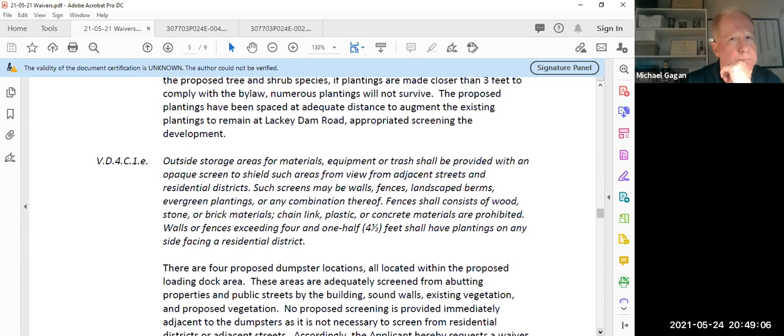Bob Largess, second. Any comments from the board? No. Hearing none, the chair votes aye. Mike Gagan, aye. Bob, aye. Bill, aye. Scott, aye. It passes 5-0.

All right, VD4C1C says you've got to have pedestrian paths between buildings and or between buildings and the open space. You saw the open space on the open space plan, and it's not really something up in here or over in here that anybody would want to walk to.

Anybody prepared to make a motion on this? Yeah, this is Mike Gagan, I'll make that motion to waive VD4C1C regarding the pedestrian paths linking the major buildings and open space parcels.

Bob Largess, second. Are there any comments or questions? Hearing none, the chair votes aye. Mike Gagan, aye. Bob, aye. Bill, aye. Scott, aye. Vote passes 5-0.

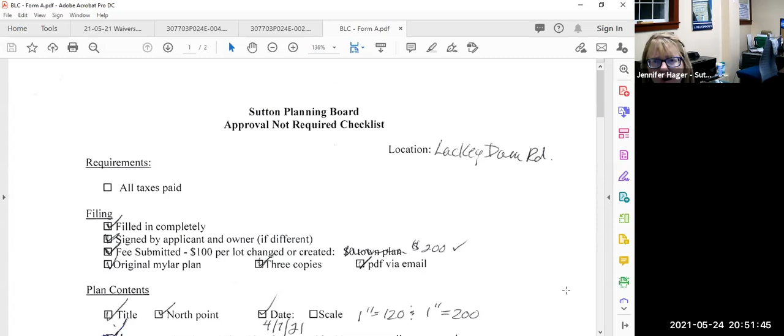Let me just grab that. Sorry, don't got it. So you've got lot 1 and lot 2. Just seeing if you could see it on any of these. You really can't.

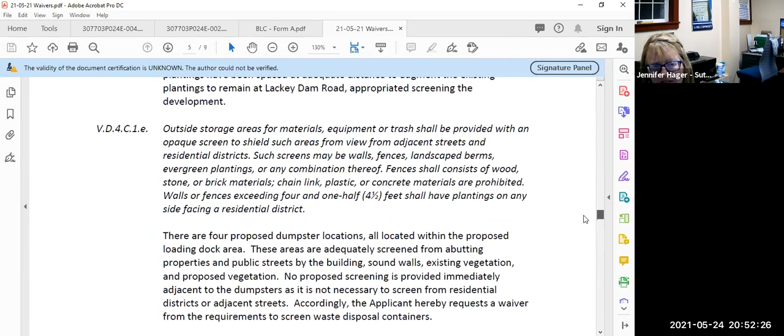This waiver requires that you have a connection between lots in the same ownership. However, you have a huge power line and basins, and they're really not going to be part of the same kind of development, not like a campus. So they're asking for a waiver from this provision that lot 1's circulation would need to be attached to lot 2's circulation, to limit the number of access points onto Lackey Dam Road.

I'll make a motion to grant this waiver, VD4C2A, relative to common ownership and access, in consideration of the nature of this development or this project. This waiver is logical. We have a second. Mike Gagan, I'll second that motion.

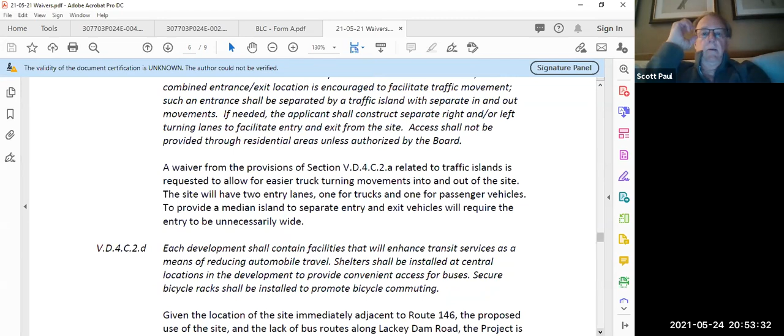Any questions or comments from the board members? No. Hearing none. Scott, aye. Mike Gagan, aye. Bill, aye. Bob Largess, aye. Chair votes aye. Vote passes 5-0.

Well, they don't want any bike racks. Huh? No bike racks or transit shelters. Yeah, so that's what this one's about. I'm always up for a bike rack, but that's totally up to the board. Probably don't want to mix bike racks and big tractor trailers.

Make a motion we grant this waiver, VD4C2D, relative to enhancing transit services at this location. Bob Largess, second. Any questions or comments from the board? No. Hearing none, the chair votes aye. Scott, aye. Bill, aye. Mike Gagan, aye. Bob Largess, aye. Vote passes 5-0.

All right, VD4C3D. All of the parking for the employees is in front of this building and the rest is on the side. Are you good with that, or do you think they should just redo the entire site plan?

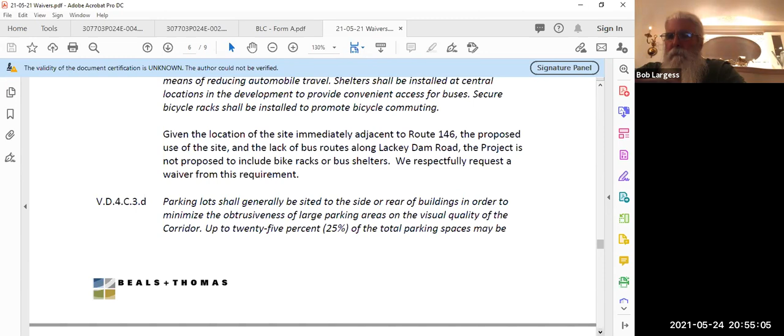I make a motion to grant this waiver of VD4C3D in consideration of the extensive planting of screening material in the front lot of this project.

The parking can be sited in the front. Motion made, Bob Largess seconds.

Any questions or comments from the board? Hearing none. Mike Gagan, aye. Bob Largess, aye. Scott, aye. Bill, aye. Chair votes aye. Passes 5-0.

We already did this one, didn't we? Well, you did it under site plan review. This is Route 146 overlay.

I'll make a motion to grant this waiver of VD4C3E, Bob Largess for second, for plantings in the parking area, and that we have the right to revisit this consideration in the ancillary lot, should it be constructed in the back.

Any questions or comments? Hearing none, the chair votes aye. Mike Gagan, aye. Bob, aye. Bill, aye. Scott, aye. Vote passes 5-0.

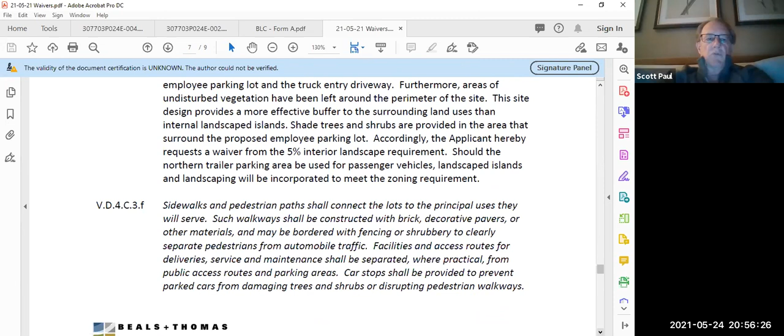This is 146 also, Jen. Yes, this one is - they don't want to do nice brick pavers across the front of the building like CarQuest. They want to just do concrete. Oh, I see. So this is in Uxbridge, mind you, but what say you?

I'll make a motion we grant this waiver, VD4C3F, relative to sidewalks and pedestrian paths, while they are constructed.

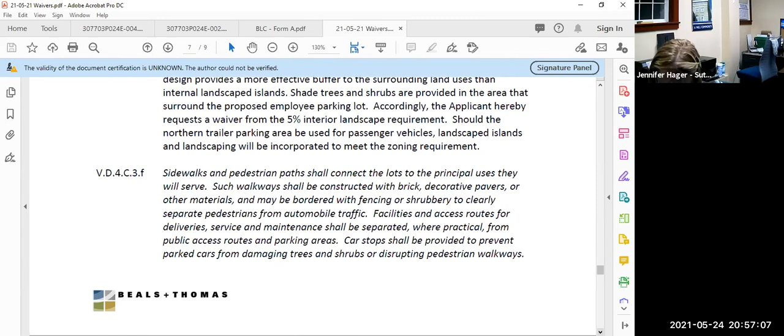So if Uxbridge decides they want it, you're gonna flip that vote? Yeah. Oh no, they can overturn us. Oh, that's right. Yeah, they have the authority. They have the power. Oh, wow.

Okay, so that was Scott and a second by Bob. Yeah, correct.

Any questions or comments from the board? No. Bill, aye. Bob, aye. Mike Gagan, aye. Scott, aye. Chair votes aye. Vote passes 5-0.

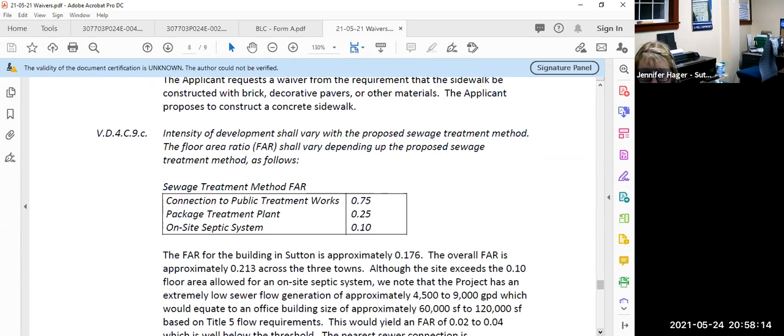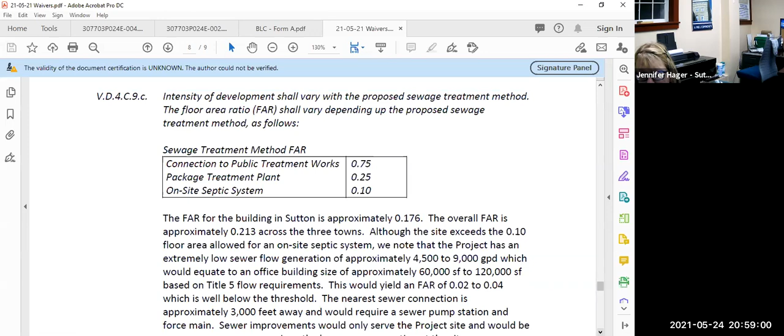In the Route 146 overlay bylaw, we have a floor area ratio calculator that says if your FAR is greater than what's shown here, it would suggest they can't have an on-site septic system. So they've justified that even though this is a giant building coverage, the type of use and number of employees won't overload the environment and soils - they only have a flow generation of 4,500 to 9,000 gallons per day, yielding an FAR of 0.02 to 0.04. So they're asking you to grant a waiver to allow an on-site septic system, considering the particulars of the actual anticipated use and flows.

Before I do the motion, I want to ask a question first. So you're saying your project has an extremely low sewage flow generation - is that because people aren't working there? They're coming and going, they're not drinking coffee? What makes it low?

It's the number of employees and people who will be on site. That's how you size the septic system for a warehouse distribution facility - it's based on the number of employees. Which is 178, but we're using a higher number because there will be other shifts. It's 15 gallons per day per employee. So the 4,500 gallons per day represents 300 people, and the upper end represents 600 total people.

So that's why we're saying it would never be more than 9,000 gallons a day. As a matter of fact, if you got up to 10,000 gallons a day, you'd be forced to do a wastewater treatment plant. Anything under 10,000 can be an on-site septic system, anything above that requires treatment. So not just our use, but warehouses and distribution facilities in general have extremely low sewer generation per building area.

Office buildings have a lot more people in them - generally based on about 4 employees per 1,000 square feet. We're going to have significantly less than that on a site with a use like this, and they'll use 15 gallons per day per person. That's Title 5 sewage estimates.

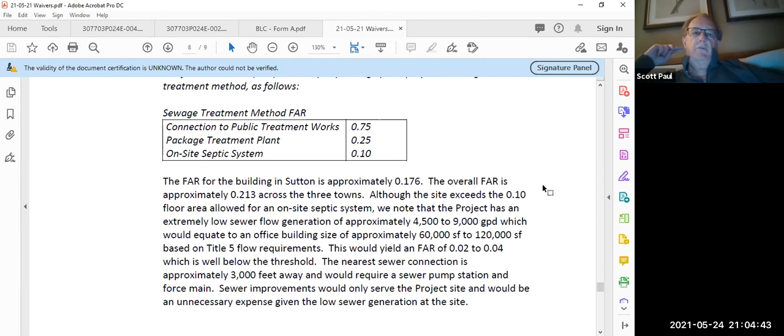So is this requirement the same for all three towns? No, this is a Route 146 overlay requirement. So Millbury has this, we have this, and I believe Northbridge has this. And the septic's not in our town though, right? This is not in Sutton. It's not in our town, no.

FYI, I did just draft, and the boss just signed, an application for a one-stop grant for water and sewer extension to this site, as well as natural gas extension to the site as well. I don't know where it'll go, but that is being pursued. But the system is in Uxbridge.

And their design flows that they have to demonstrate to the Board of Health, they'll have to use requirements out of Title 5, whether it's a certain usage per square foot for the office. I forget how they do warehouse, if it's by number of employee or square footage, or you have options to do it either way. But there are standardized numbers in Title 5 for the design flow of the septic system.

Yeah, okay, any more questions on that? How do you feel about a motion? I'm not sure we need to make one.

It's not in our town, or does that not matter? You've made a whole ton that weren't really in your town, but if you want to skip this, we can skip this. If the applicant doesn't feel uneasy and the rest of the board complies, we can jump over it and just say that's Uxbridge's issue.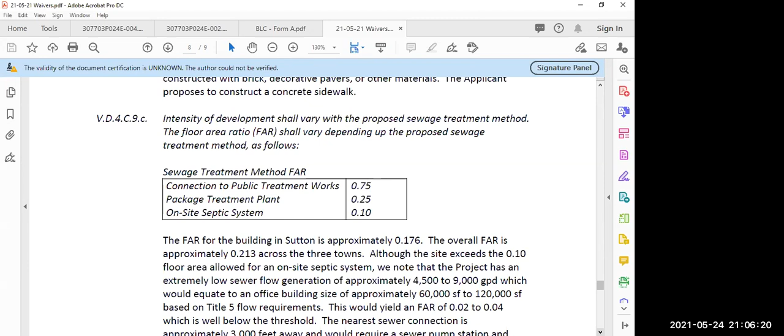All right with me. I mean, a portion of the building is in Sutton. That's the only reason I prefer you actually vote it, because a portion of the building that's being serviced by the septic system sits in Sutton. Yeah, see, if this restriction is more restrictive than the town that it's in, then it seems to be moot to me. What do you mean? What's the point?

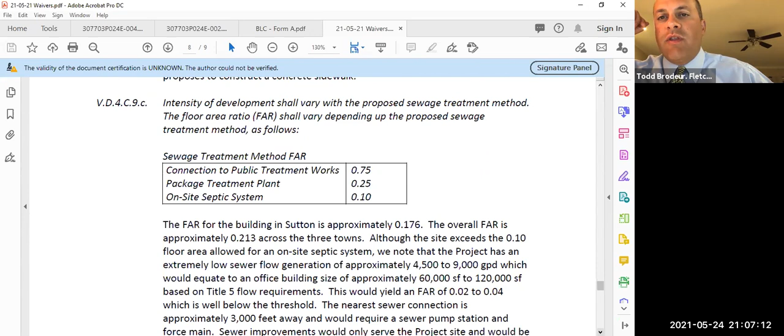What does the applicant think of our position? Mark, the engineer, responds: I think, as Jen mentioned, it's on the list because a portion of the building's in Sutton, so we've tried to treat the site as a comprehensive whole. To the extent that portion of the building is in Sutton, we felt it was necessary for you to review this, and if you have no issue with it, we'd prefer it be voted on instead of left aside.

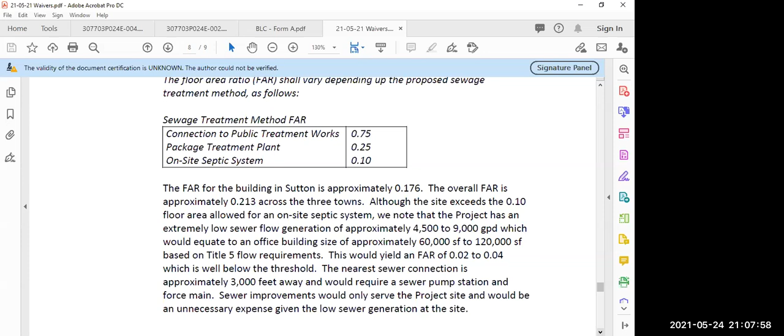I just have a question for the engineer. The groundwater discharge permit, does that require more space than your typical septic system? It depends how high your flow is. It would require a treatment building, or tanks. Let's say it's 10,000 gallons a day. No, it wouldn't require more space, but it would require a lot more treatment, as Mr. Walsh mentioned. You're treating it to a much higher level than a typical septic system.

Yes, so it's very costly, especially at the school campus. How about lowering the flow? Yeah, so we have. Okay, got it.

I'll make Scott that one. You okay? What do you want me to do? You want me to make a motion? If you want to, or if not, we'll ask somebody else to make a motion.

Well, again, it's weird to me that there's three different regulations because of the town differences here. Yes. I'm not sure that I understand, they'd like to see all the Ts crossed. I think I'd just as soon circle back, considering the hour of this evening. I think we should circle back on this. I would tend to agree, because we had the other issue over here with ourselves and Grafton and what's going on in which community, and so forth and so on. I would basically prefer that we deal with the Sutton issues.

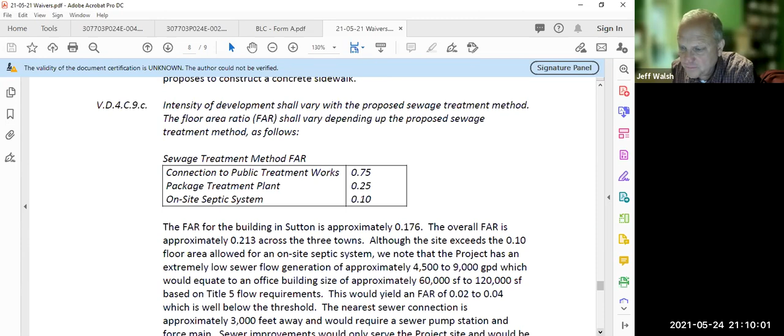Could I leave you with something to think about on this issue? Because it talks to the floor area of the building and the floor area of the land, even the wastewater generating portion of the building that's in Sutton, I see this regulation likely applying to the development. And therefore it may be worthy of the board voting on, but think about that. I could be wrong. I agree with Jeff as well. So let's mull this one over. We can come back to that.

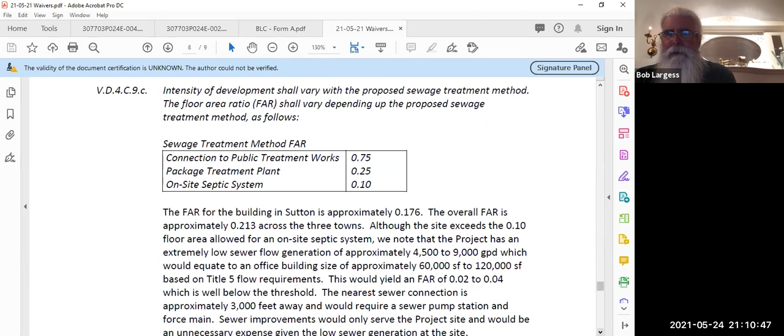And that was the last waiver, I believe. Well, through the chairperson, I understand Scott's concerns, but we have two partners in this project. And I'd say to have this thing go backward, the sewage, I don't want it to end up in Sutton. It's a big building. If something goes wrong, I think we should be part of the big plan.

So yeah, I'm suggesting we come back at some time with more knowledge or understanding of what, say, Douglas -- I mean, is this Douglas in Douglas, right? No, it's in Uxbridge. Oh, this is in Uxbridge, okay. Yeah, and then we can get on board, because it's a big building, and what if something goes wrong -- this is a big one. So just want to make sure that Uxbridge is comfortable with this as well. I think that's reasonable.

And so we're not doing any more joint meetings, they're over with? No, we're getting back together on June 17th. Okay, and that will be the motion coming out of this meeting tonight, unless you think you want to talk to them separately some more. So they'll be meeting with Uxbridge on Wednesday, and Todd, hopefully you guys can address this subject with Uxbridge, so when we come back together on the 17th we'll know if Uxbridge is comfortable with this. That's good, yeah.

Sure, can I just make one more comment? This may or may not be helpful, but when I think about this particular waiver, we're looking at whether, if you look at the floor area ratio chart, we exceed the 0.1, and that would trigger you to have that package treatment plant, or you'd be in that category. What we're saying is the flows are such that it's not applicable to have that package treatment plant requirement -- we want the on-site septic system. So in this case, yes, the system's in Uxbridge, but you have a regulation that could require something more than the on-site septic system because the building and some of the flows are generated from Sutton. So I think it leaves the issue too open and hanging. If you're not in agreement that the on-site septic system is appropriate, then you wouldn't grant us the waiver. If you think it's appropriate based on the size and flows we've talked about, then you would grant us the waiver.

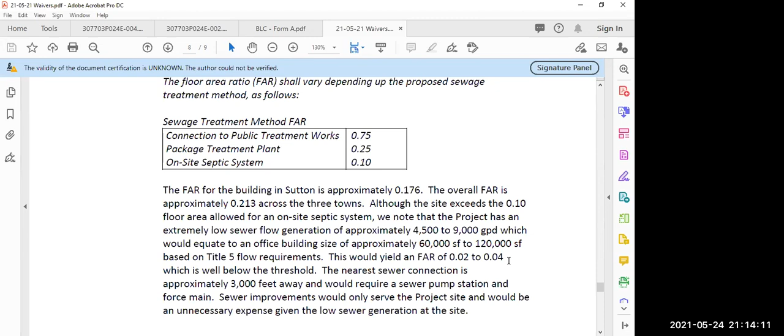Well, if a few of the board members think they need a little bit more time or information, I think we should hold off on the vote if the majority feels that way. Okay, we'll just put this to the next meeting, which will probably be the June 17th meeting where we're going to try to take some action on the project.

So it would behoove the applicant to make sure they get some input on this from Uxbridge and make sure Uxbridge seems comfortable with this. And if you can relay that information back to us, that would potentially be helpful.

We could continue this hearing to June 14th instead, just to talk about that one thing, but it sounds like if Uxbridge is comfortable, the planning board here will be more comfortable. Yeah, I would definitely agree with that. Okay, no, that's no problem. We have no concern with holding it to the June 17th joint meeting.

And again, we will have a conversation with Uxbridge on Wednesday. If it comes up, I'll let Jen know, and if there's something further we need to do on it, we'll do so. All right, good, awesome. Okay, so I think we're done with waivers, right?

Yes. Okay, all right, so is there any other information the board thinks it needs in advance of taking some potential action on this project?

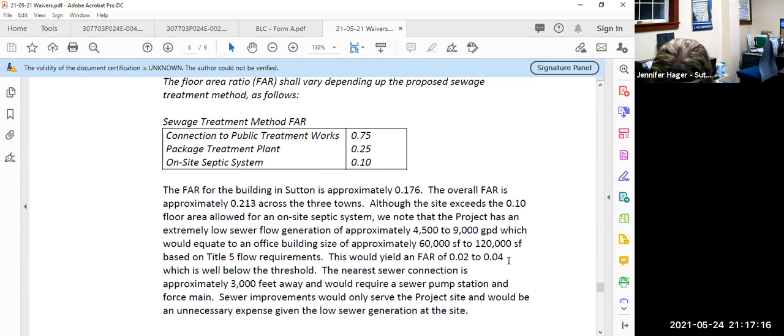All right, so unless somebody else has questions or comments, we need a motion to continue to June 17th at 7 p.m. I'll make that motion, Bob Largess. Do I have a second? Mike Gagan, I'll second that motion. Any questions or comments? No.

Hearing none, the chair votes aye. Mike Gagan, aye. Bob, aye. Bill, aye. Scott? Scott? Aye. Oh, good.

Okay, the next item on the agenda. Well, thanks to everyone that came in here to provide us with information on the Blackstone Logistics Center.

The next item on here is the Form A plans for 104 Mendon Road. You'll recall 104 Mendon Road was Mark Stevenson's retreat lot, so it was an existing parcel. We're just designating that as a retreat lot. So all we need, it ran the appeal period with no appeals. The covenant has been executed.

So we just need a motion to approve the plan dated 4/8/21. I can pull that on the screen if you want, or we can just go right to the motion, up to you. I'll make a motion that we grant, we sign the plan for 104 Mendon Road. Bob Largess, second, whatever that date was. 4/8/21. Anybody have any questions or comments on that?

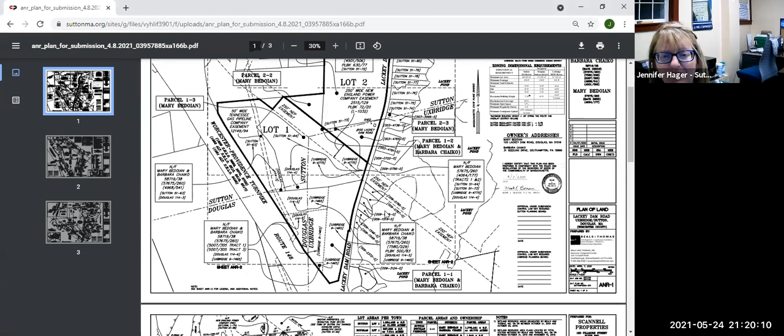Can you go back to that for a minute? Yes, I absolutely can. So both Lot 1 and Lot 2 are included in this plan for Blackstone Logistics? No, Blackstone Logistics is only on... let me reshare that. Lot 1, I think, right? Lot 2's the other lot. Yep, Lot 2 is the remainder, it's being carved off, okay.

So Blackstone Logistics sits here and has frontage on Lackey Dam Road in Uxbridge, primarily. Entirely? It's hard to see the town. Yeah, this is the town line right here. Yep, I see it. Let me just go back because there is the nice color coded plan. There you go. So the color coding is ownership, believe it or not.

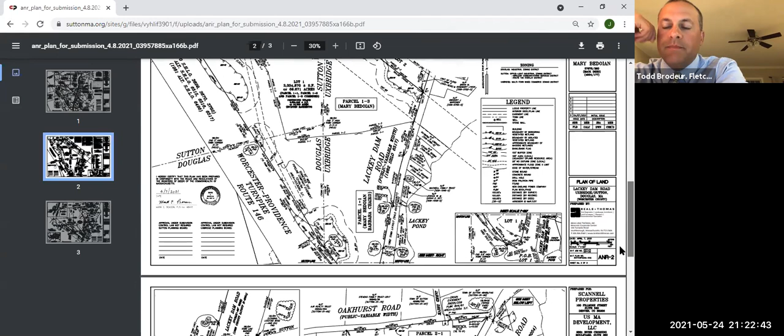Do you have any questions? Uxbridge signed it already, right? That's correct, Uxbridge already voted their approval and endorsed the plan. What's the date on the plan? The original date was 4/7/21 with a revision date of 5/12/21.

I'll make a motion we sign the ANR plan of land on Lackey Dam Road for Mary Bedoian and Barbara Chaiko, dated 4/7/21 and revised 5/12/21. Kyle Bergeson, I'll second that motion. Any comments or questions from other members of the board? Hearing none, chair votes aye. Bob Lodge, aye. Mike Egan, aye. Kyle Bergeson, aye. Scott, aye. Vote passes 5-0.

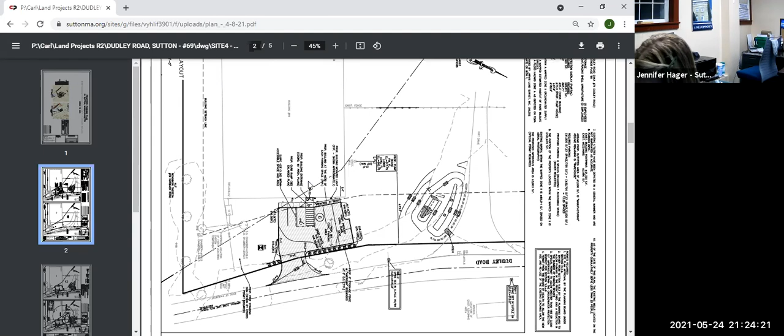Any comments or questions from any of the members of the board? No. Okay, chair votes aye. Bob, aye. Mike Gagan, aye. Kyle Bergson, aye. Scott, aye. Vote passes 5-0.

Next item is Mickey's Car Wash bonding. These guys needed to get their occupancy permits a little while back. So based on past precedent, I had them work up this estimate and submit a check in this amount to the town. The paving, per a site visit report from Graves,

stated that the top course bituminous asphalt was done. So I just need the board to acknowledge that this bond amount was submitted 4/1, and that 18,500 is being released because the bituminous asphalt is done. And we will be retaining the remaining funds.

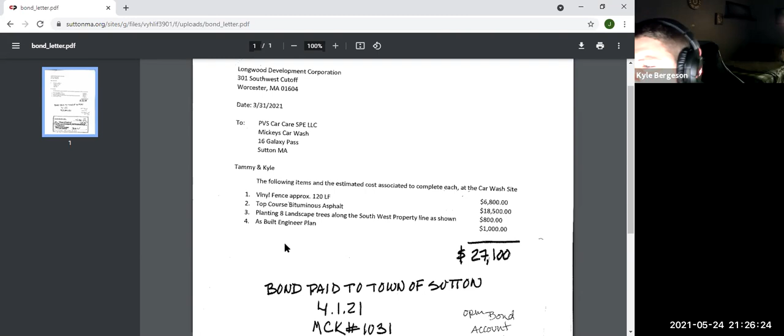Bob Rogers seconds. Any comments? Hearing none, we'll have a vote. Chair votes aye. Kyle Bergson, aye. Scott, aye. Mike Gagan, aye. Bob Rogers, aye. Okay, good.

Vote passes 5-0. Just so everybody knows, the chair's having trouble here with the computer powering down, just some kind of an issue. In case I go offline, that's what's happening. All right, okay.

Minutes from meeting on 5/3/2021. I assume everyone has had the opportunity to read and review these. Can I hear, anybody got any questions on it? Hearing none, can we have a motion to accept the minutes?

Mike Gagan, I'll make a motion to accept the minutes from 5/3/21. Do we have a second? Kyle Bergson, I'll second that. Had to make sure I was present before I could second.

Mike Gagan, aye. Kyle Bergson, aye. Chair votes aye. Vote passes 4-0. Or Bill, you were here, right? Bill was absent. Oh, he was, okay, 4-0.

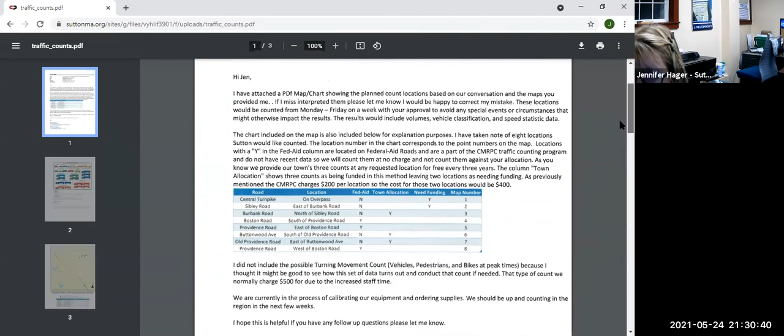So if the board is in agreement with that, all of these counts will be conducted between now and early fall in the town of Sutton. Good with that? Yeah, looks good, absolutely, $400 worth of good planning. I like the fact it's got all the different types of vehicles differentiated. I was surprised how much those traffic counters can pick up.

Alright, the next thing on the agenda I just wanted to make clear that in June, again, you have 2 June meetings, that's it: June 14th, which is a regular planning board meeting, and June 17th, a Thursday night, that's Blackstone Logistics. That's it in June. We're only working 1 week in June, and then you're off until July 12th.

I'm concerned Wally might want to be present a couple more meetings, so maybe we need to add extra meetings.

June 17th will still be on Zoom, but June 14th you'll be back in the building. Mask free? I have no idea, I think we'll have to see what the governor has to say. We'll wait for the governor.